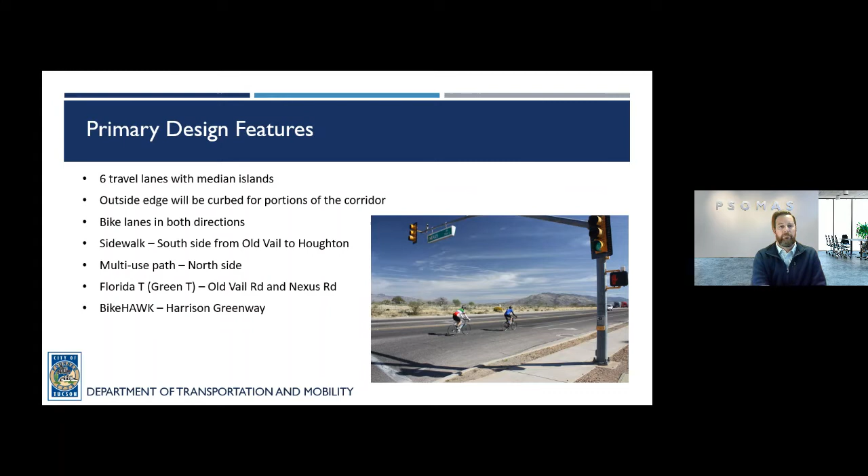And then there's an existing bike HAWK at the Harrison Greenway that will be improved and expanded for this project. We will be making drainage improvements, making sure that this is an all-weather access road. There will be continuous street lighting throughout the corridor. Public art will be a part of the project as well, and that process has not started yet. And then finally, we'll have landscaping and irrigation.

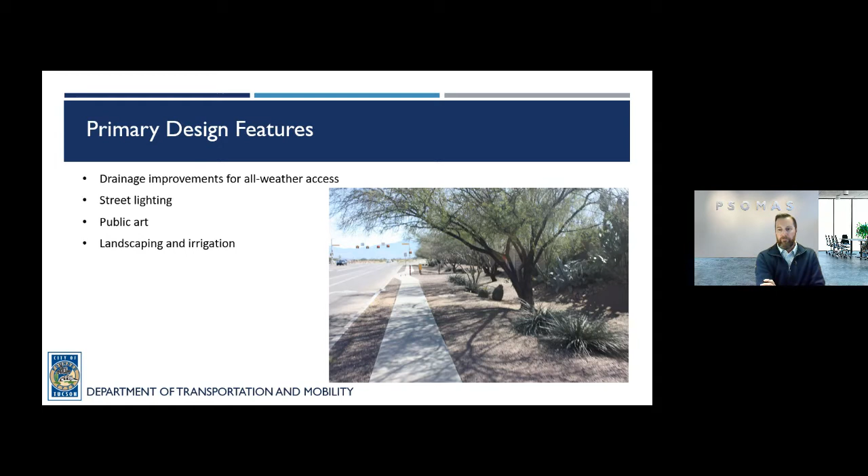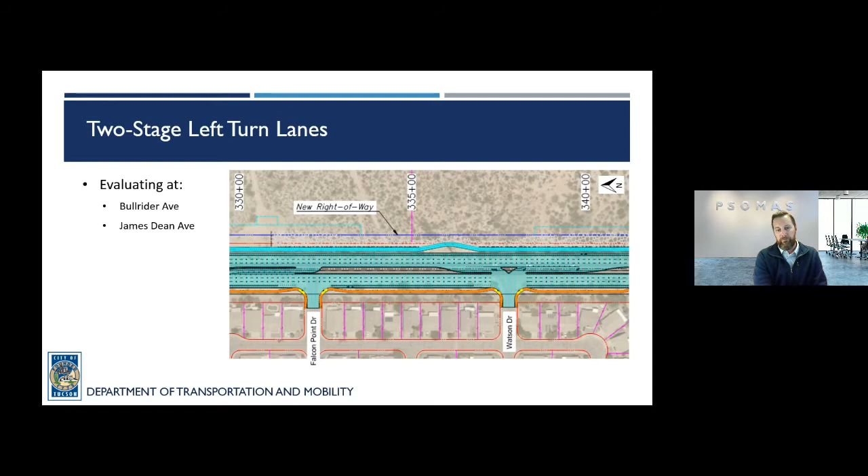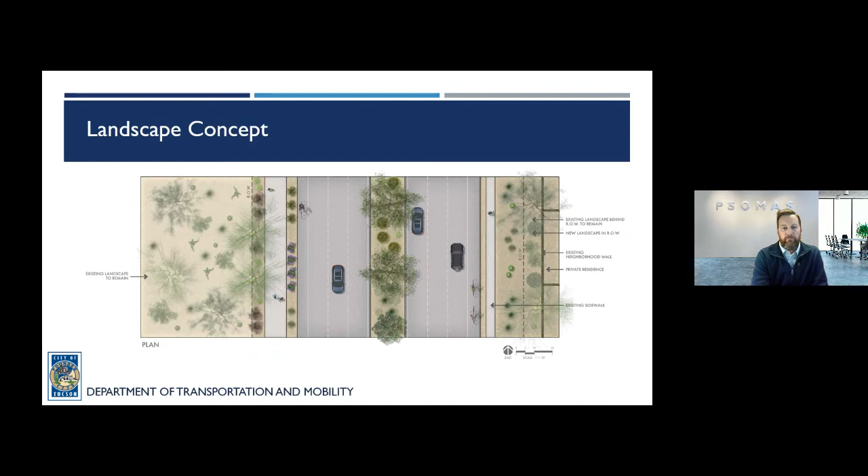Let's see, this is a landscape concept, and landscape is going to consist of irrigated and non-irrigated native plantings with ground cover that would be crushed stone or decomposed granite or something along those lines. And water harvesting basins will be used where possible. One thing to note is there is a lot of the established landscaping areas along Rita Ranch, so planting next to those landscaping areas will mimic the existing plant palettes. And then we will be taking into consideration maintenance requirements and water needs for the landscape design.

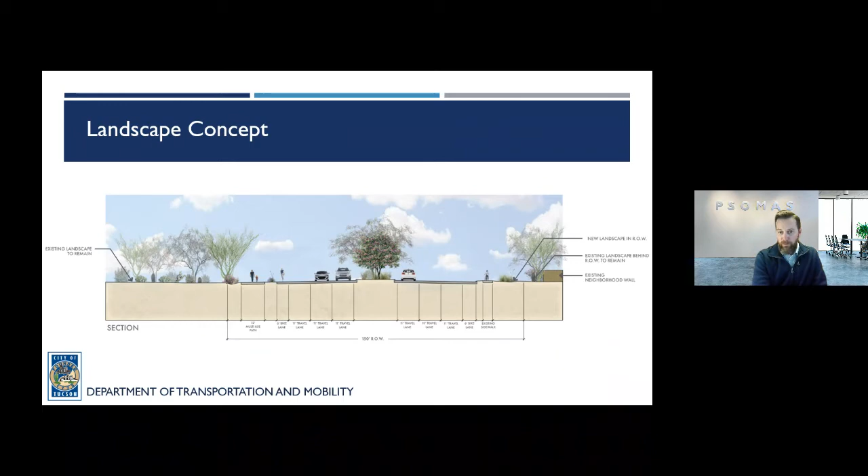What I'm going to do now is switch over to a PDF of the entire corridor so I can step through it from west to east. Let me get my screen situated here. And share again.

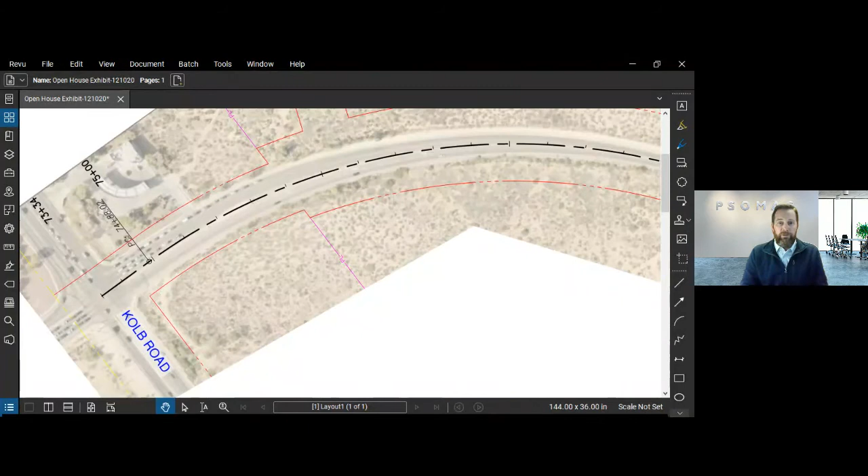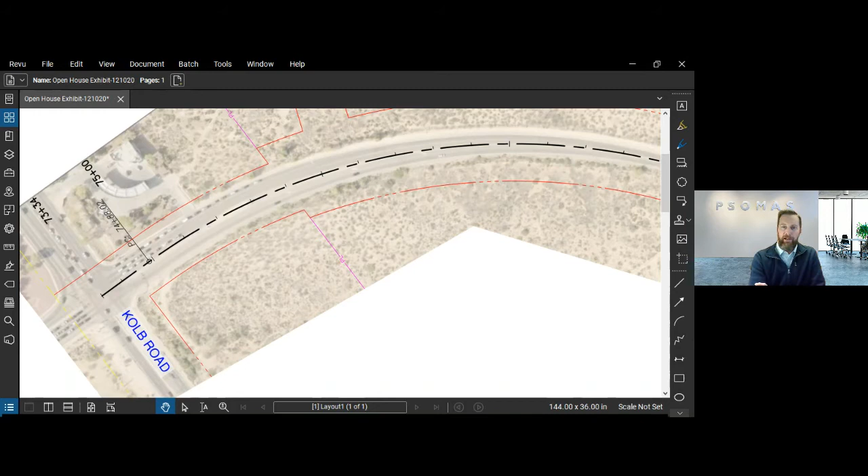Okay. Hopefully everyone is now seeing a PDF of the project area, and right now we're way over at the west end of the project, and this is Kolb Road with north being up to the left. Unfortunately, the aerial is a little bit dated. It does not have the recently improved intersection improvements shown, so you'll kind of have to use your imagination for that. But as we move to the east, you'll notice right here, this yellow is where we're going to extend the path to.

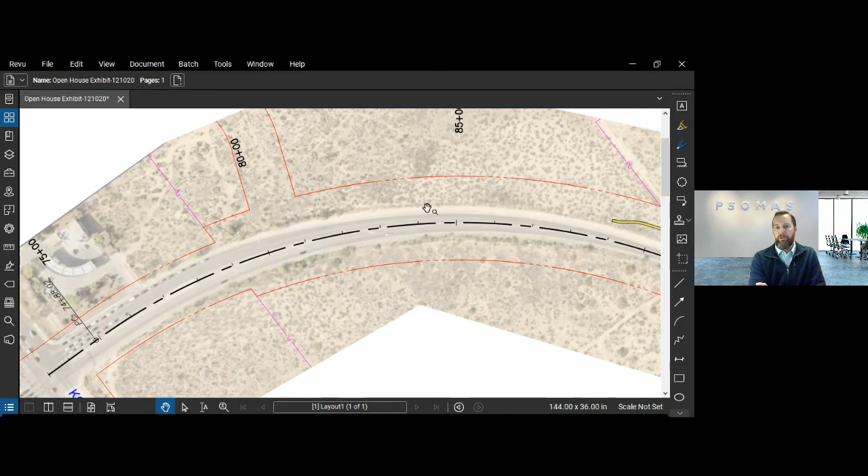So for the new improvements, Kolb and Valencia, there's a sidewalk that goes over to about the station 80+00, and then it turns into a path for bicyclists. So we're going to tie into that, extend it to the east until we get past this drainage area. And then we're going to widen out to 12 feet and have the true multi-use path from that point.

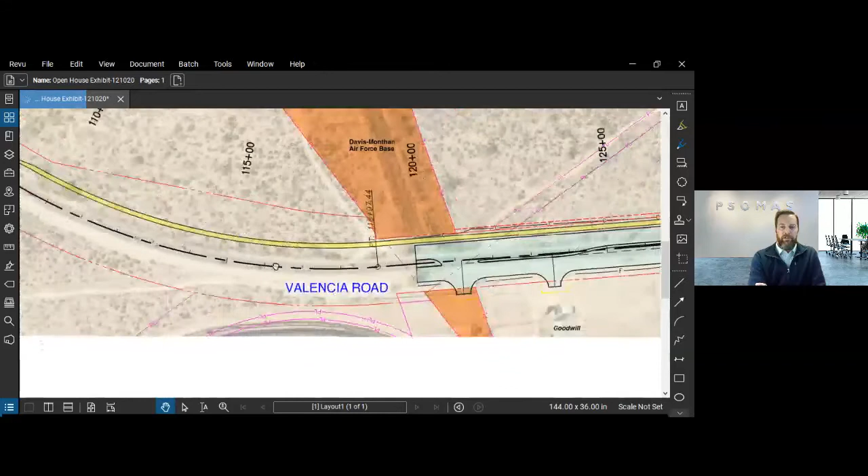As we continue to the east, right here is about where we will tie into the existing improvements. For reference, this is the Goodwill right here. So that's about where we tie into the existing improvements. Continue to the east, we have tried to locate median openings that benefit the area, as well as providing places for people to make U-turns.

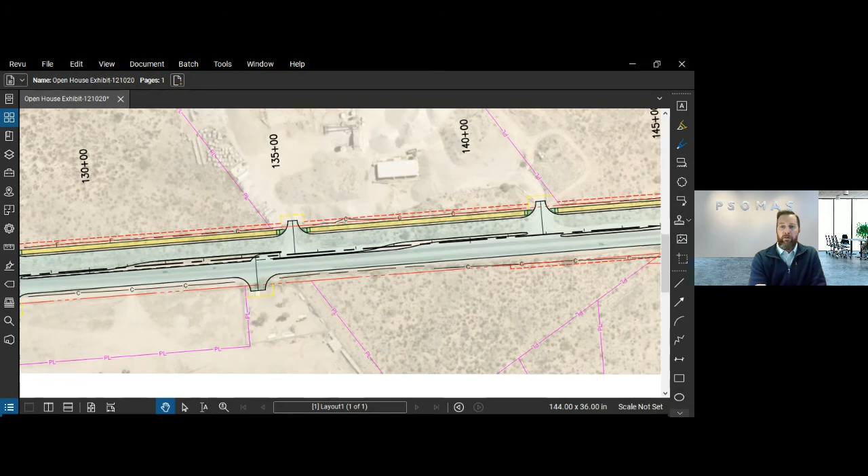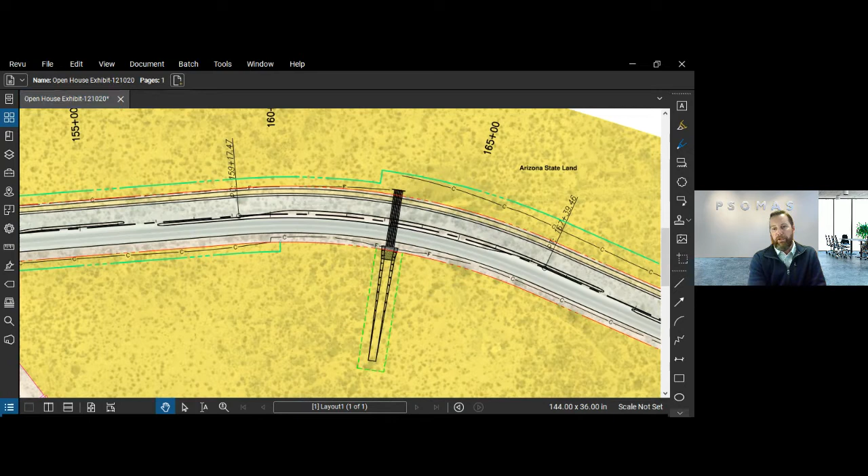Continuing to the east, here's the Pantano alignment. This yellow here, this is Arizona state land. So it's on both sides of the corridor between about the Pantano alignment and about Old Vail Road. And one thing over here at the west end of the project, there's currently no plans for development. However, we do know that is a possibility and could be coming in the future. But right now there haven't been any plans for development at this point.

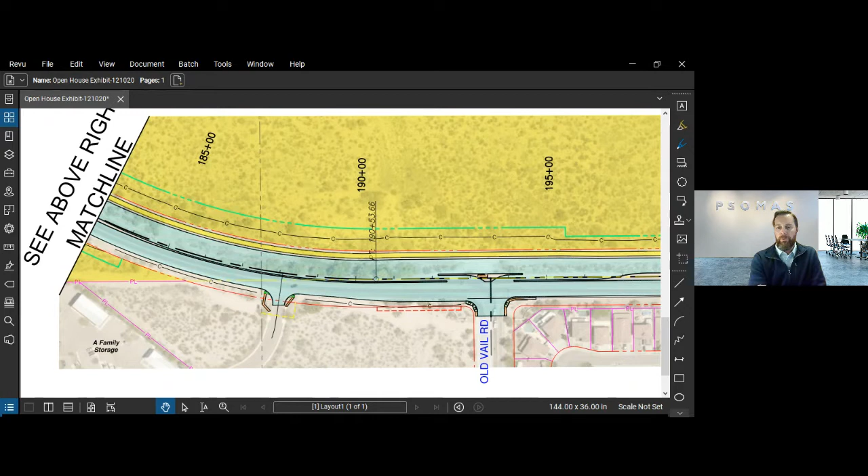Let's see, continuing to the east. I'm going to switch over to the other part of the screen as we approach Old Vail Road. And this is Old Vail Road. So now north is straight up on this sheet. And here's Old Vail Road. For orientation, a family storage is right over here. And here's the first of those Florida T's here. So folks will be able to make a left turn, use this acceleration lane, and then merge into traffic going around.

You'd also be able to use a left turn lane to get on into Old Vail Road, just like a standard intersection. Oh, one thing I did want to mention, at Old Vail Road, we are aware that there is a ponding issue at this corner. That will be fixed with this project, so we are aware of that, and we do plan on fixing that ponding issue.

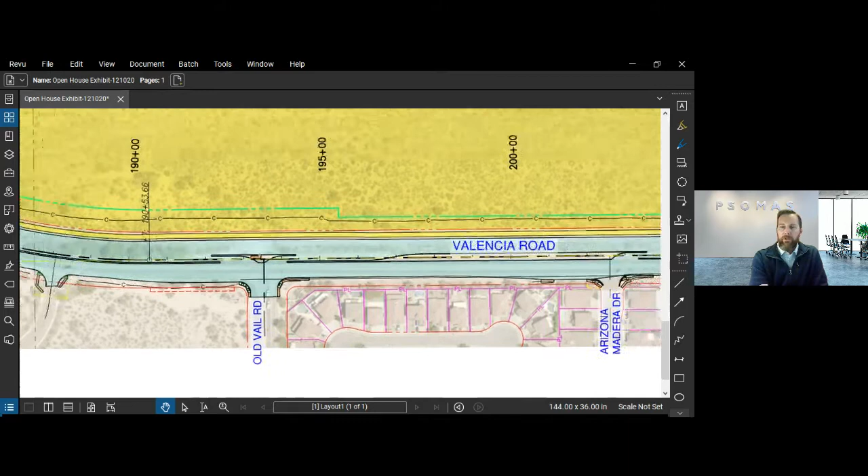Continuing to the east, here's Bull Rider Avenue. So this is one of those areas where I had mentioned possible use of the two-stage left. Again, the benefits are people that are coming out of this neighborhood would have a place to stage outside of traffic, so the rear end of the vehicle doesn't sit in the traffic lanes and things like that. And it's really a safe place to stage until there's a gap and they can merge into traffic.

Now, the drawbacks of the two-stage left are basically you lose the ability to make a U-turn. So the reason I'm bringing that up is if we had a two-stage left at Bull Rider as well as James Dean, you would lose your ability to make a U-turn between Old Vail Road and east of Nexus Road. So it's a fairly long ways without a place to make a U-turn. However, each of these neighborhoods would have the ability to get out and make a left turn onto Valencia to go westbound, either at Old Vail Road or Bull Rider or James Dean.

Continuing to the east, anywhere where there's an existing right turn lane into the neighborhoods, we are including those in the future design, so those will be there for the future. Wanted to mention that. And here's Nexus, and again, Florida T here, which we've kind of gone over. The speed limit for the roadway will be 45 miles an hour in both directions from Kolb over to Houghton.

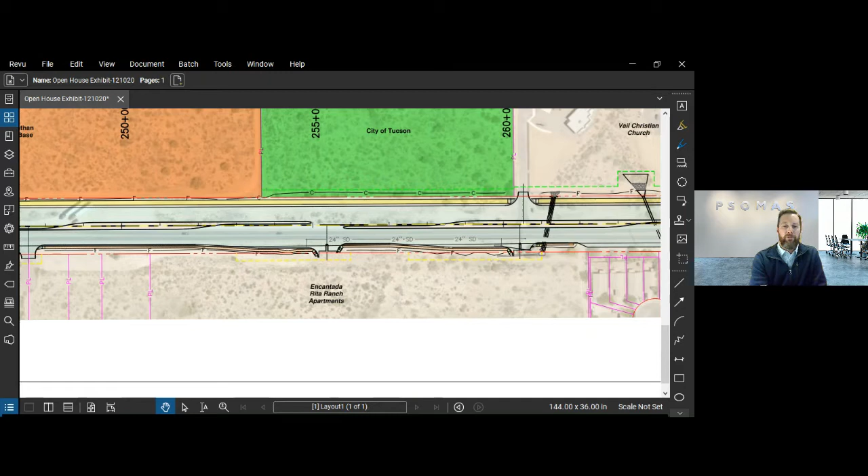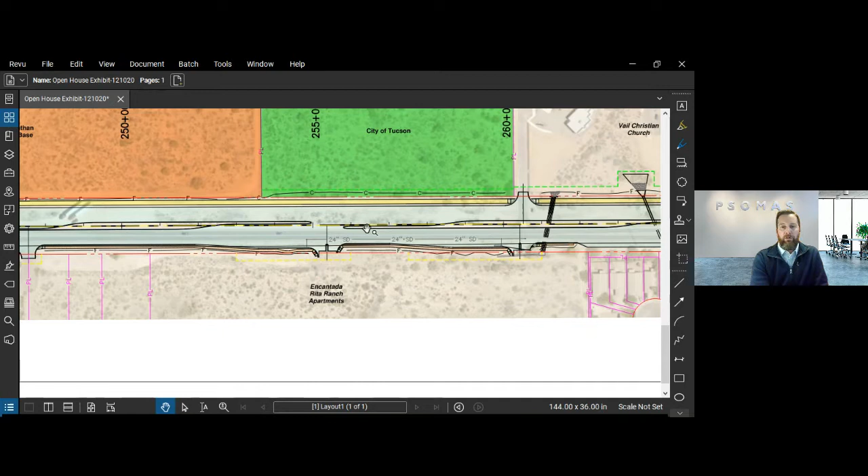Right here, kind of across the street from the Safeway Shopping Center and Walgreens, is Davis-Monthan Air Force Base. So that's here in the kind of orangish color. It abuts Valencia Road. There's no access or anything at that point, but we do acknowledge that it abuts the roadway there. Continuing to the east, the Encantada Rita Ranch apartments are currently being constructed. So we have been sending our surveyors out there to make sure that we tie in to their improvements without any hitches. So we are aware of that, and again, tying in to those improvements.

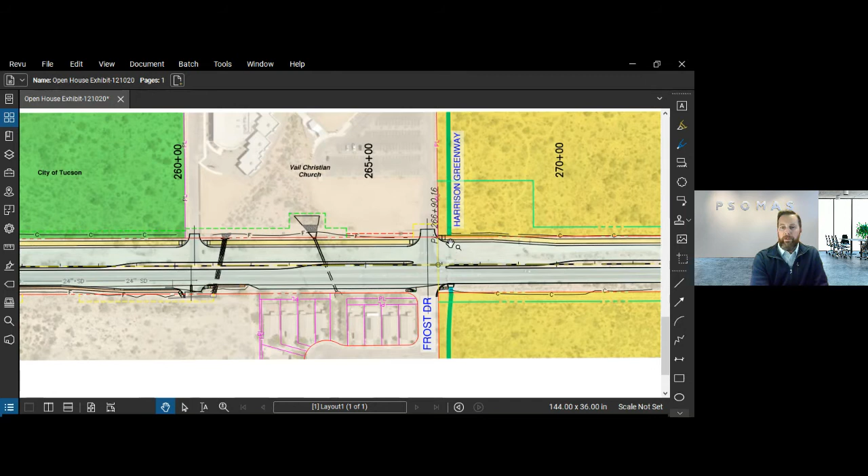Moving to the east, here's the Vail Christian Church. There will be a full median opening at that location. And the Harrison Greenway, where the existing bike HAWK is, that will be improved for the full 6-lane crossing there. It will still remain a bike HAWK. Continuing to the east, you can see some drainage improvements. And this, again, we're back into this yellow. This is the state land area, both north and south of the roadway.

We are aware that there are a few developments that are in conceptual stage at this point, particularly on the south side of the road. We have located the median openings to be consistent with their conceptual plans. They're not very far along into design yet, so we may need to tweak if they get further along during final design, and we can certainly match up those locations. The north side is a little bit further from development, although there are some plans in the works at this point.

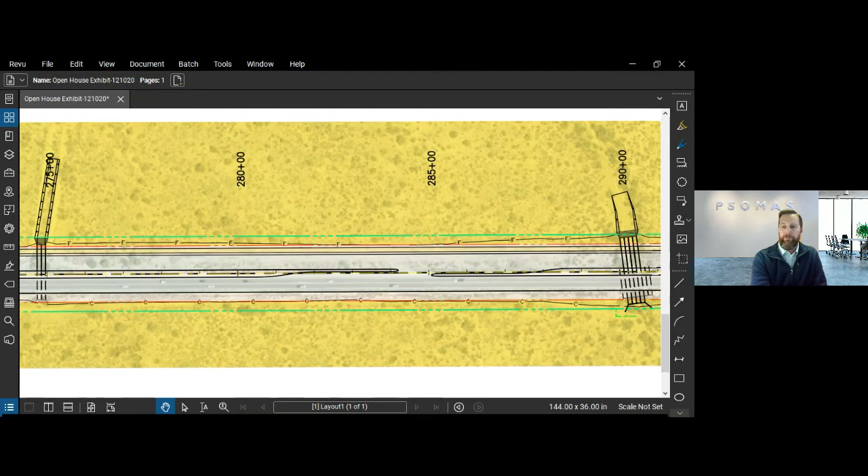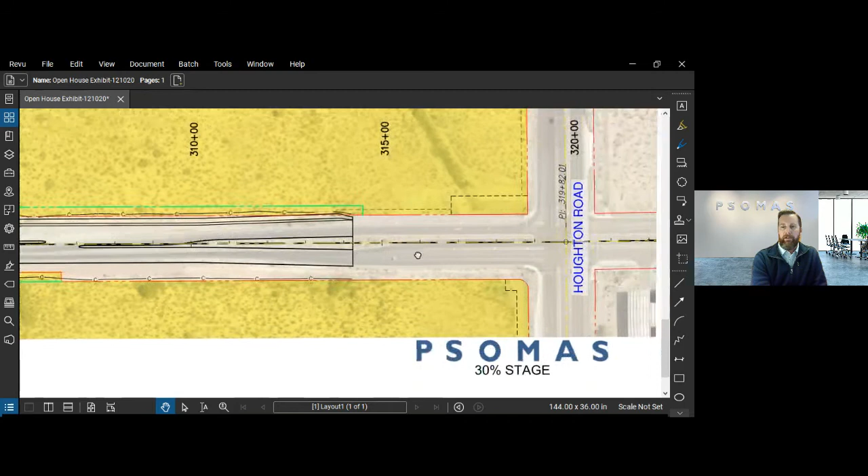And as we continue moving to the east, we will tie into the existing improvements that were made probably 6, 7, 8 years ago at Houghton Road and Valencia here. And that's the end of our project. Let me switch back over.

And I will share PowerPoint. And we are ready for questions and any open discussion that may be on. Okay, let me see if any questions have come up yet.

First question here is, can you remind us what Psomas stands for? So Psomas is actually a name, and that was the person that founded the company. So Psomas is the last name. It's not an acronym, but it is the name of our firm. And we are an engineering and surveying firm here in Tucson, headquartered out of Los Angeles.

Next question, with the Florida T at Nexus, how are vehicles coming out of Safeway lot by the housing going to turn around and go west? So if they come out of the Safeway lot directly onto Valencia, they would have to go through the Nexus intersection and then make a U-turn. If they come out of the shopping center on Nexus, they would be able to make a left directly onto Valencia at the Florida T intersection.